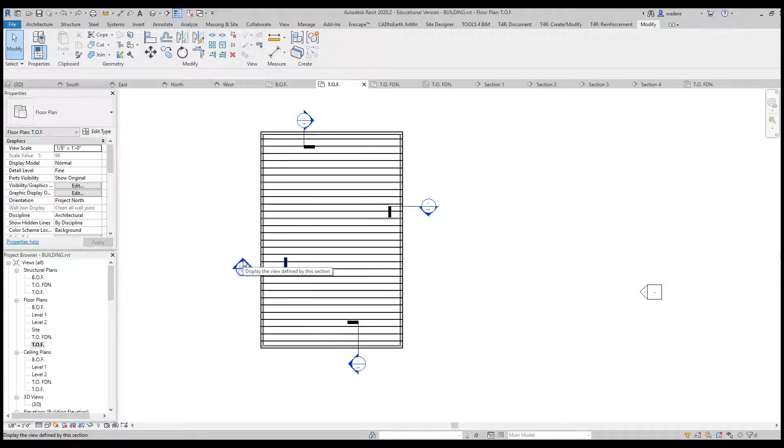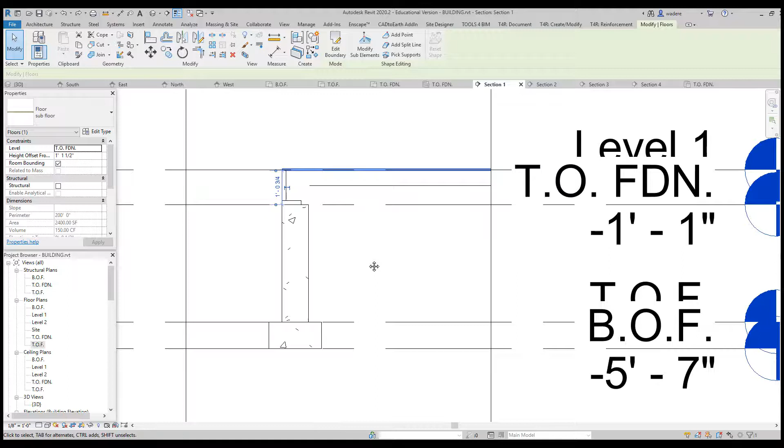One of the first things I want you to do is cut a section through each of the 4 sides of your building. When I went back and looked at mine, I had some issues with things not aligning properly, so it's very important that you get everything aligned properly before you move on. You should have your footing, your foundation wall, your 2x8 sill plate, your 2x12 floor joist, and then your subfloor on top of that. Check all 4 walls to make sure everything is in alignment and that yours looks similar to mine.

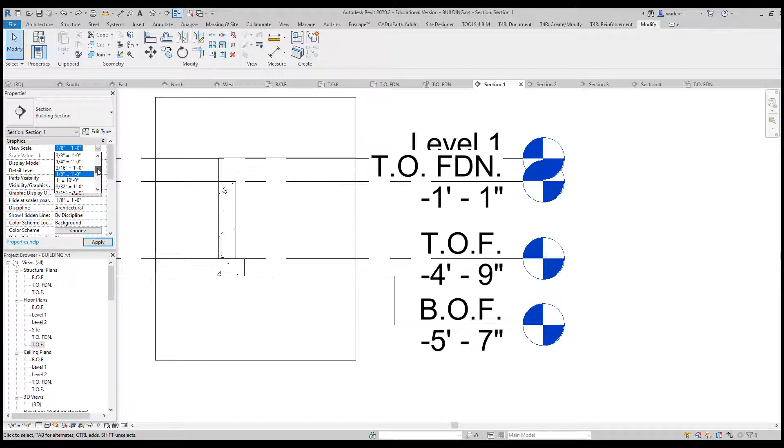In the last video, we discovered that we were not level with our level 1, so I want to get this put back where it's supposed to be. This is just kind of a big mess, and if you look at the bottom left corner, we're at 1/8 inch equals a foot. If we come up to the view scale and change this to 1/2 inch equals a foot and hit apply, now we can read those numbers a lot better. Typically when you're doing a section, you're going to do it at a much larger scale.

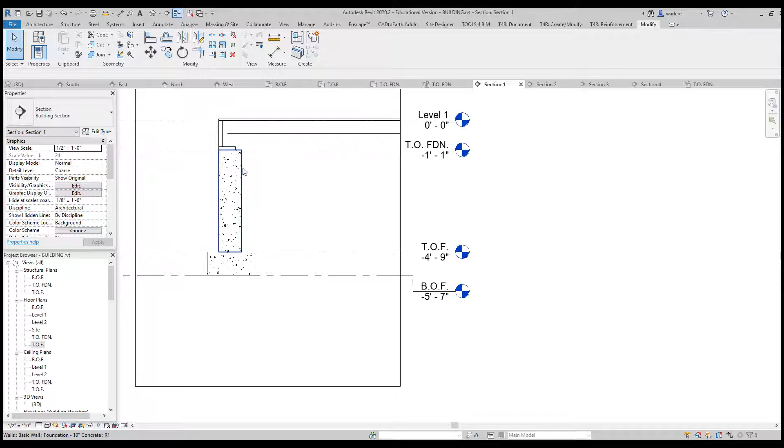The very first thing I want to do, if you recall, is we tied a lot of things to the top of the footing and the top of the foundation. I'm looking at this as a teachable moment, as I made a mistake on my math, which probably doesn't surprise any of you. The teachable moment is that I get to show you how to fix it very easily, and again, this is why it's important to constrain things to certain levels.

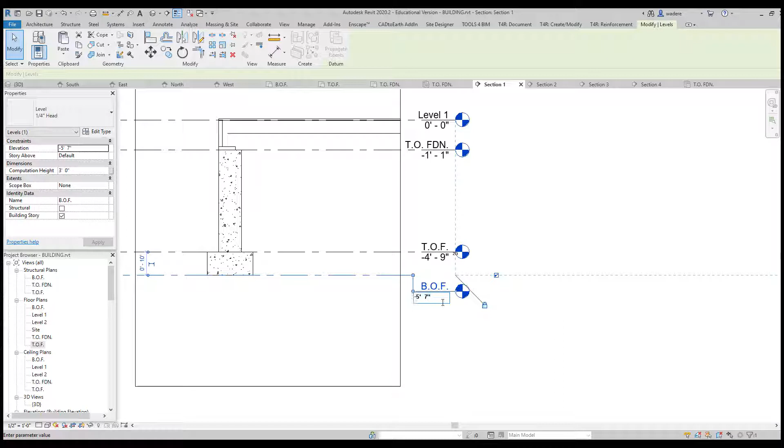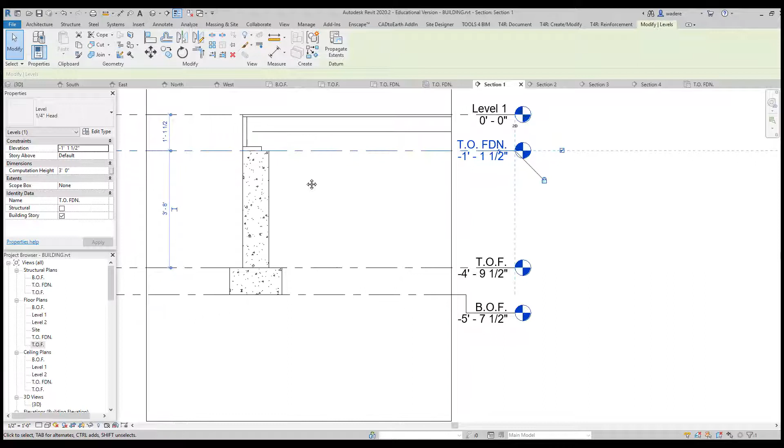So the very first thing is I figured out that I'm 1/2 inch off. I need to make this 5'7 and a half. And this one, I need to make 4'9 and a half. I want to make this -1 foot, 1 and a half. And now everything up here moved down because I had it tied to my top of foundation, so I very quickly fixed my issue. This just goes to show you that we do make mistakes, but luckily we caught this one early on and were able to fix it very quickly. Again, a wonderful teaching moment.

Here is another situation that I would hope you had realized. This one I actually did intentionally. We had shown our 2x12 floor joist spanning 40 feet. Hopefully you realize that a floor joist cannot span 40 feet. If it did, you would have a lot of deflection and your floor materials such as tile would pop up, your furniture would not set level, things would roll off the cabinets.

There could be all kinds of issues. Typically your engineer is going to tell you what it needs to be, but here's a floor joist table, and we were going to use 2x12s. You want to look at where it says maximum span. We did ours at 24 inches on center, so really we can't go any more than 14 feet 4 inches. I wouldn't even want to go 20 feet with them 12 inches on center. So let's look at doing 16 inches on center, and our maximum span then is going to be 17 feet 7 inches.

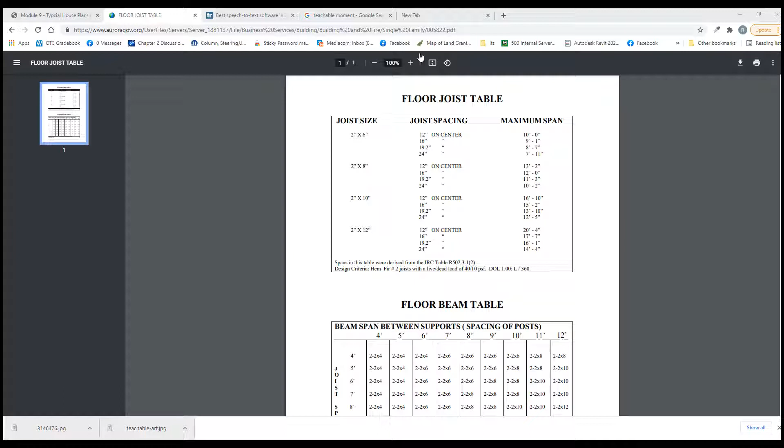So to change our floor joist spacing, the easiest thing to do is to go to your 3D view and then pick your subfloor. Make sure it says subfloor, and then right click and do hide in view elements. That way we can actually see all of our joists.

If I put my cursor over here, you'll notice if I pick right here, it just picks the one joist, but if I come out this way, it picks all of them. So if I pick those, all I have to do is come over here, change this to 16 inches on center, and hit apply.

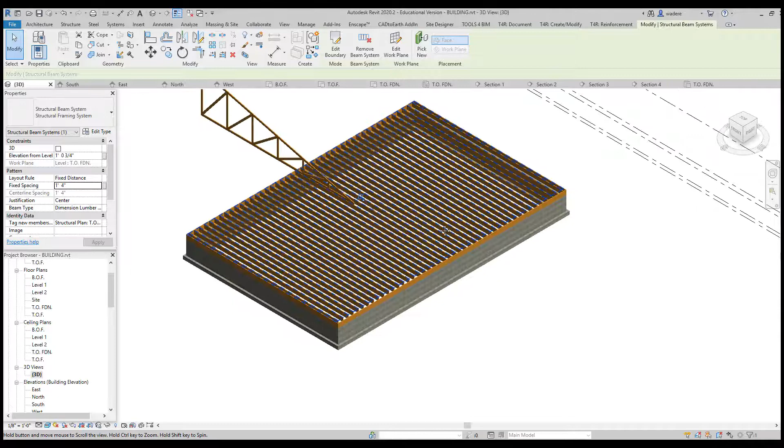And now you see it just automatically updated it. How awesome is that? Just think if you had to go make that change in AutoCAD, how long that would take you.

Then all I have to do is come down here to the light bulb, grab that floor again, and say unhide element, and close that window. So that one was very, very easy to fix.

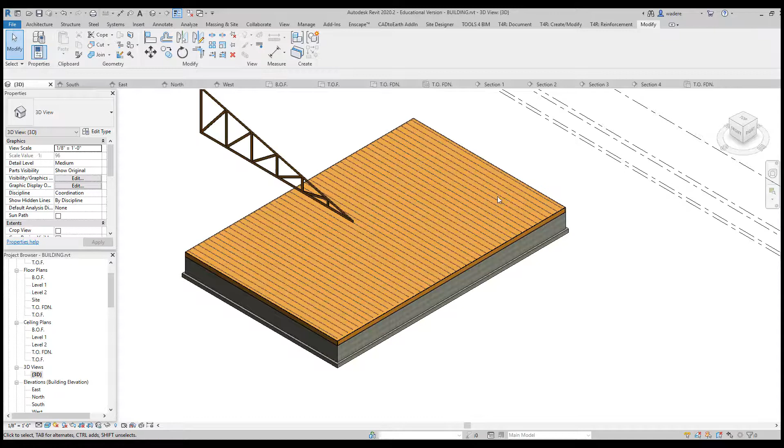The next thing we've got to do is put in some intermediate supports to support the spans we were looking at on the chart. According to the chart, our maximum span for a 2x12 floor joist at 16 inches on center, which is what we just changed ours to, is 17 feet 7 inches.

Our building in one direction is 40 feet and in the other direction is 60 feet. So we need to add some intermediate supports to break these floor joists and support them, because otherwise, like I mentioned earlier, we're going to have sagging floors and lots of issues.

In the 40-foot direction, we need to divide that by 3, so we'll have 2 rows of supports running in the 60-foot direction. In the 60-foot direction, we're going to add 3 rows of supports to carry the load.

You could just come in and put in another foundation wall with a footing, but that costs a lot of money, so we don't want to do that. Instead, we are going to create some little columns underneath our support areas where we need the supports.

These columns are going to have first a footing that is 24 inches by 24 inches by 10 inches deep - a square that is 24 inches by 24 inches and 10 inches under that column. The column itself is going to be a 10-inch round concrete column.

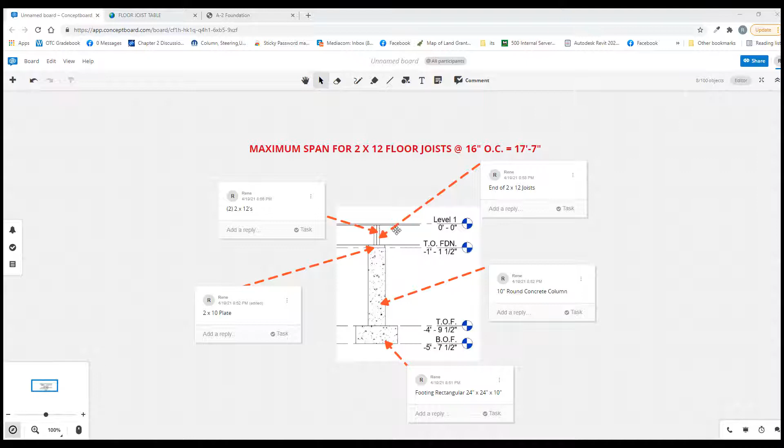On top of that we will have a 2x10 plate, and then we will break our 2x12s at our distances with 2 2x12 joists for that intermediate support, and our subfloor will just continue across that. So this is kind of what we're getting ready to do.

So I'm going to go back to my structural plan, to my top of footing, and the first thing I'm going to do is just place a column in here. Once I get the columns placed, it's very easy to add the footing and the remainder of the pieces.

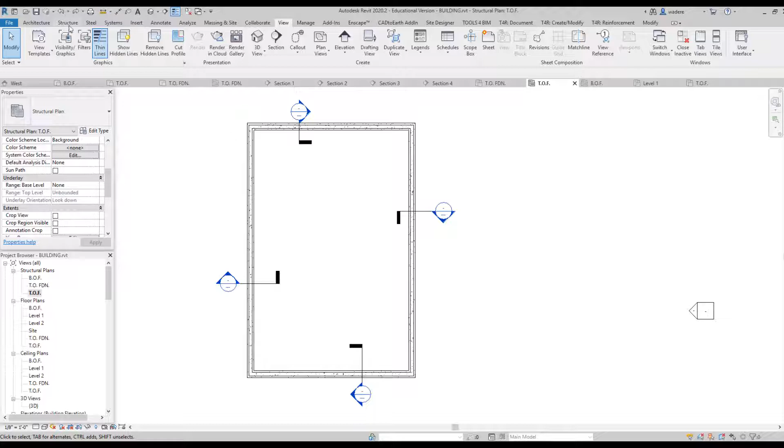So I'm going to start there - go to structure, go to column, and go to load family. We come down here to structural columns, and you see you have concrete, and if you go in there you see you have a round column. So that is what we're going to go with, a concrete round column.

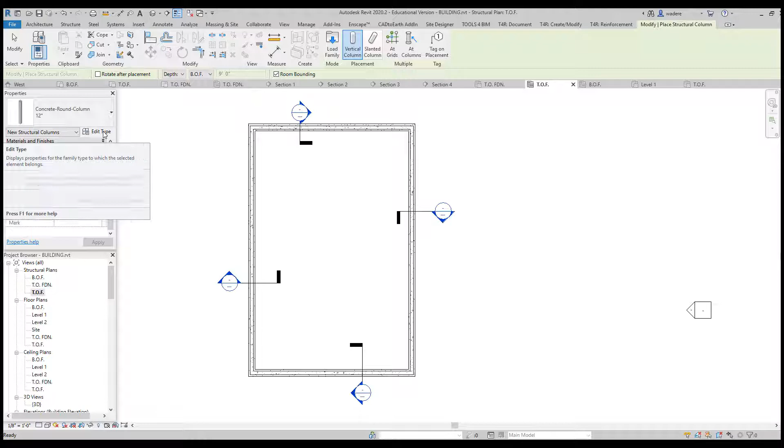If I double click on that, it brings it into my drawing. I have already created one - yours probably came in as like a 12-inch. So we need to modify that to be a 10-inch, which I have already done. You would just go into edit type, duplicate the name, make it 10 inches, and change this dimension to be 10 inches. Once you've done that, you are ready to place it.

You can see I have placed mine. If I zoom in on that, you'll see the base level is bottom of footing, which I really want to be at top of footing. The first thing I'm going to do is change the top level because I want it to be at the top of my foundation. So I'm going to change that. Now the base level I am going to change to my top of footing, and say apply.

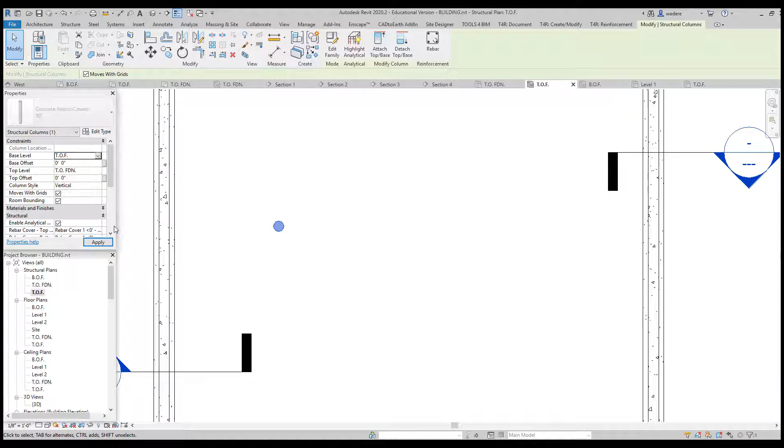So now I have a column. If we go and look at this three-dimensionally, and I scroll around to where I can see below, you can see I have a nice round column.

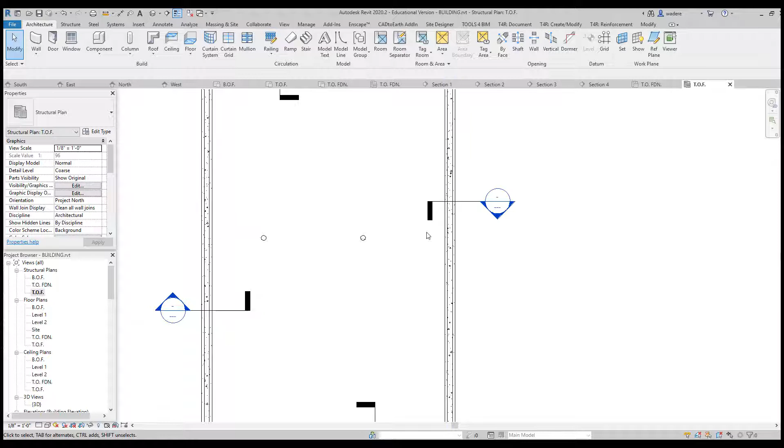So I'm going to go back to my top of footing plan, and the next thing I'm going to do is grab this and copy it from here to here, and I want to have 3 equal spaces in here. So first I'll go to my annotate tab and do my dimensions, and I want to pick the inside of this foundation wall, not my footing - this is my foundation over here.

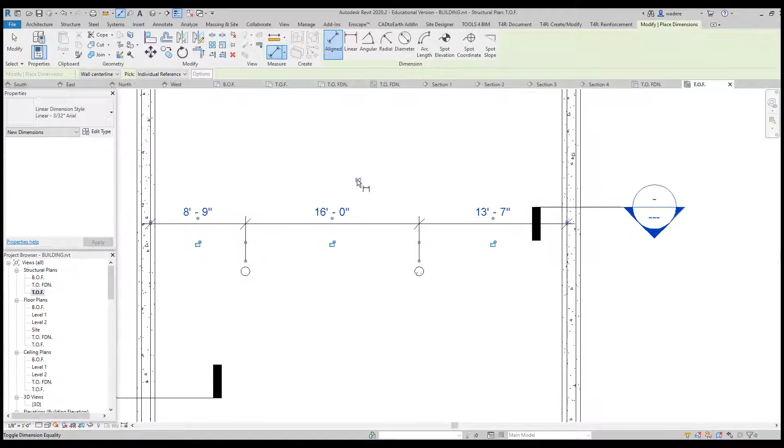And then I want to go to the center point of my column, and again I want to pick my foundation wall. Then I can click on the equal sign, and now it put it equally in here the way that I wanted it. So that is great.

The next thing I need to do is divide my space this direction. I said I wanted 3 columns in here. So I'm going to go to modify, go to copy, grab these, and do copy. I want to copy multiple because I'm going to copy from here to here and then down to here.

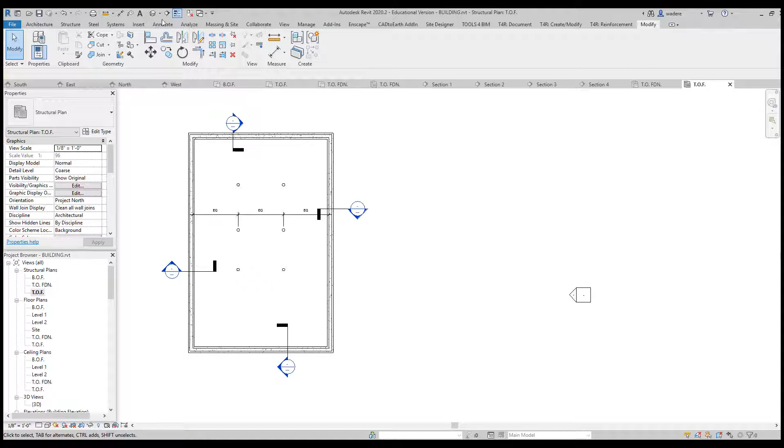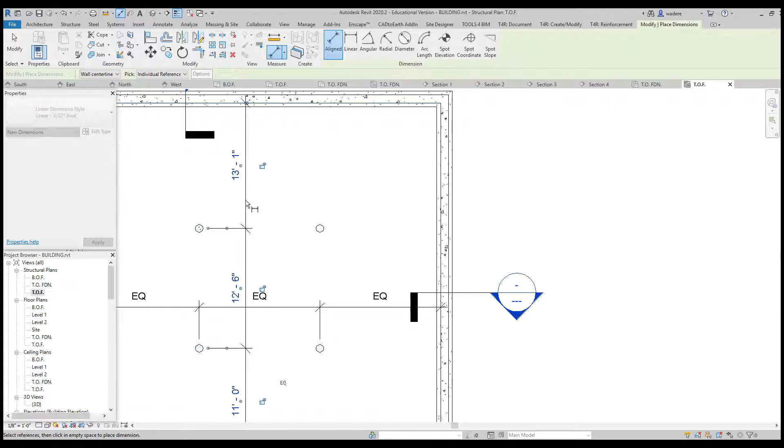Again, I'm going to use my dimension tool and do aligned. I want to come from the foundation wall, not the footing wall, to the midpoint, to the midpoint, and back to my foundation wall. I'm going to place that, and again click on my equal, and now they should all be placed equally. I'm going to get rid of these dimensions so you have a better idea.

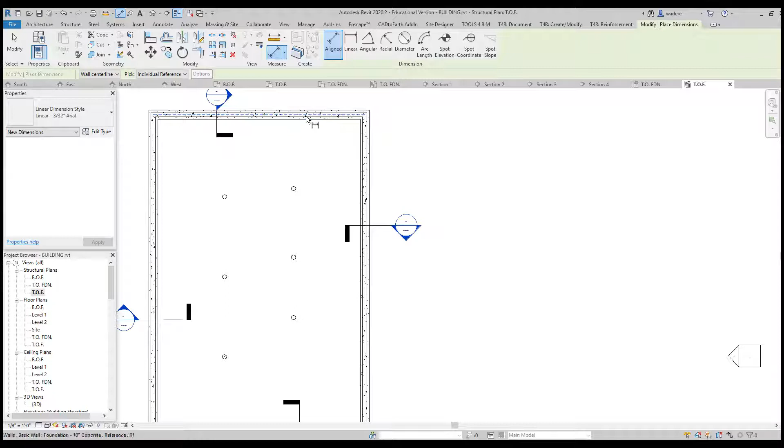I also received a warning over here, and I just need to unconstrain my items. Now that I removed those dimension lines, I see that I have not moved the other row of columns, so I need to do the same thing.

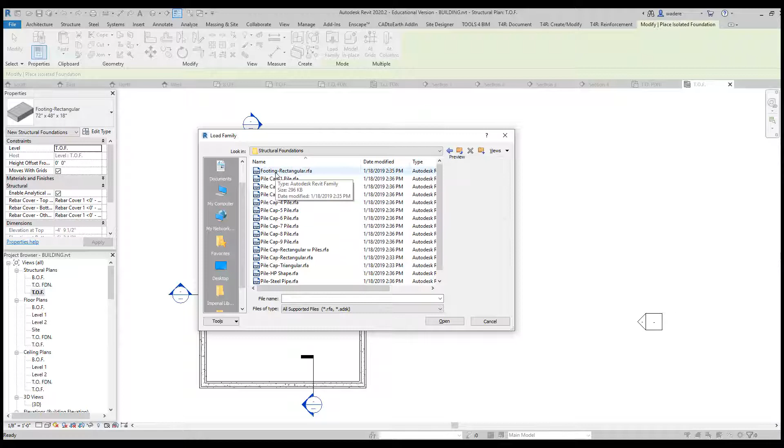Next, I want to place my footings. So if I go to structure and go to isolated, it's going to probably tell you you need to load family. So you're going to go to load family, scroll down to structural foundations, and pick just the footing rectangular and say open.

As you can see, this is a really large footing, and according to our information that we looked at earlier, we wanted a 24 inch by 24 inch by 10 inch. The choices we have are way larger, so we need to edit type, do duplicate, and change this to 24 inches, 24 inches, and we wanted ours to be 10 inches deep.

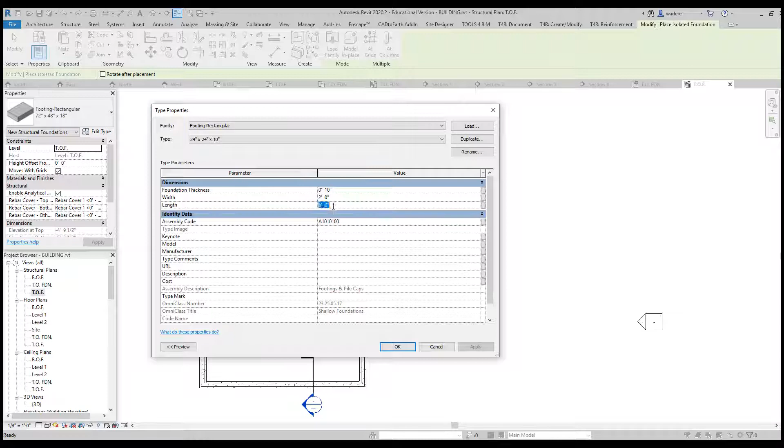And say OK. Then here we need to change the thickness to 10 inches, and this needs to be 2 feet, and this needs to be 2 feet, and say OK. Now we have our 24 inch by 10 inch footing, and I want the level to be top of footing.

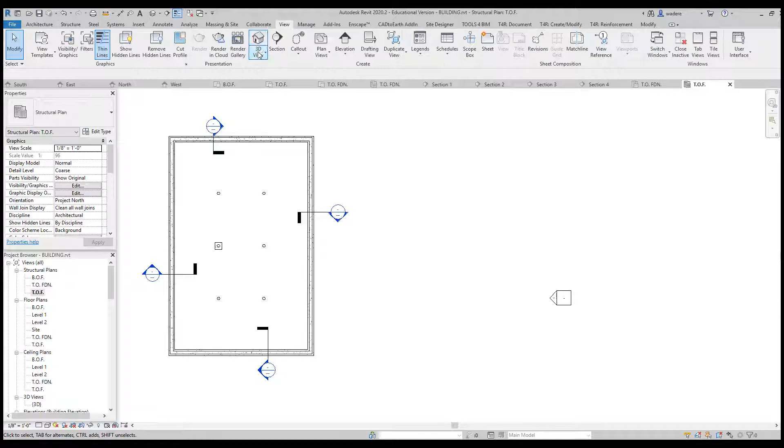I'm going to scroll over here, and I'm just going to place one of these for now before I place all of them, and I want to do a 3D view to make sure it came in where I wanted it to, and it looks really good.

So I'm going to go ahead and continue and place these. Again, I'm just going to go back to my structure tab, isolated, I already have it, and I'm just going to pick the center point of each of my columns and place this.

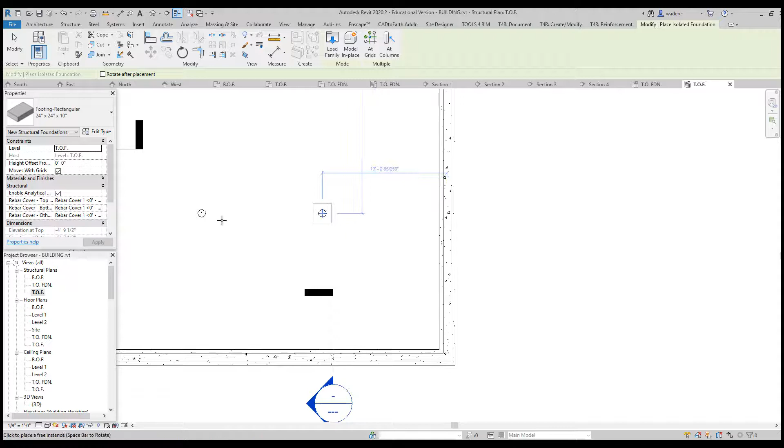Looking at this from the plan view, right now we have 2x12s running continually this way, and we've placed some supports this way to help break up that load span between each one of these. So what we're going to do is add 2x12s running this direction at the same level as our joists.

So that they can come into that column support and have something to tie into and set on top of those columns. And again, we can't span our 2x12s all the way this direction, so we'll span one set from here to here, one set from here to here, one set from here to here, etc, so they rest in each direction on these columns.

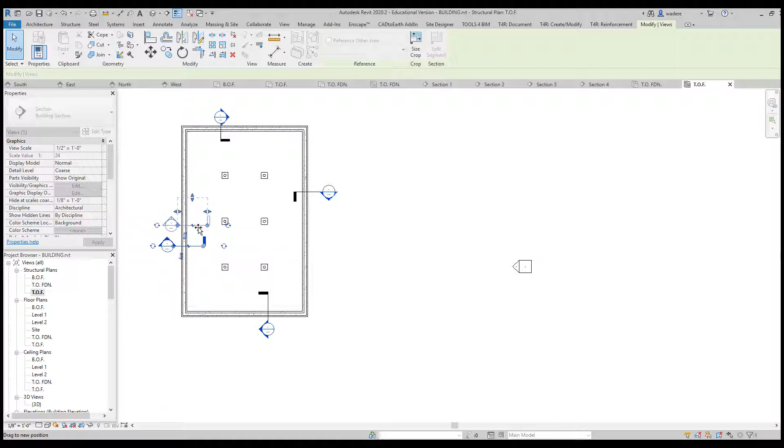To make this a little easier to understand what's going on, I'm going to move this section mark up, and drag this out and this out. And I'm actually going to go to my section so you can see what I'm talking about.

If I change my view to fine, you'll see right here is my 2x12 that's running in the 40-foot direction. What I'm going to do is break this right here. Now we are not actually going to go in and break ours because I don't want to spend the time doing that. But they would actually stop at this location, and these two 2x12s that we're going to run back in the other direction would be placed there.

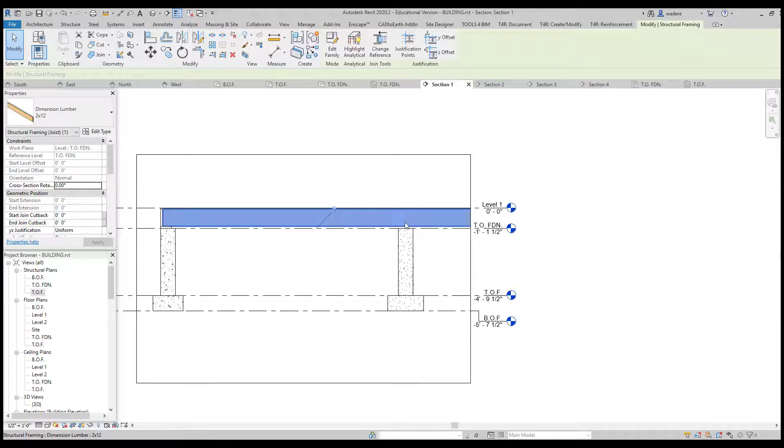The next thing I'm going to do before I go any further is pull this out to where I can see the next column, and I'm going to do something to make things go just a little bit faster for me.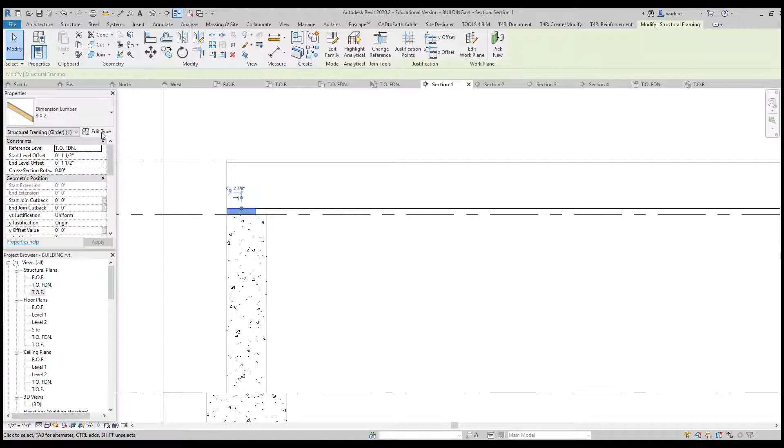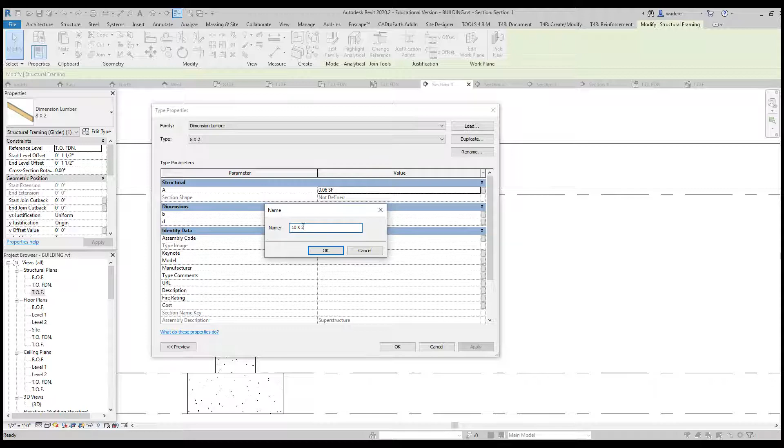I'm going to grab this 8x2 that we did at the perimeter, copy it, and go from its midpoint to the midpoint of my column. What we wanted was an actual 2x10, so it lays the way we want it. I'm going to pick this, go to edit type, duplicate it, and make it a 10x2. A 2x10 is actually 9 1/4 by 1 1/2, so I'll change that and say okay.

Now you see it got bigger. I'm going to grab this one. Now that I already have my 10x2, I'm going to pick it. So we very quickly added those on there.

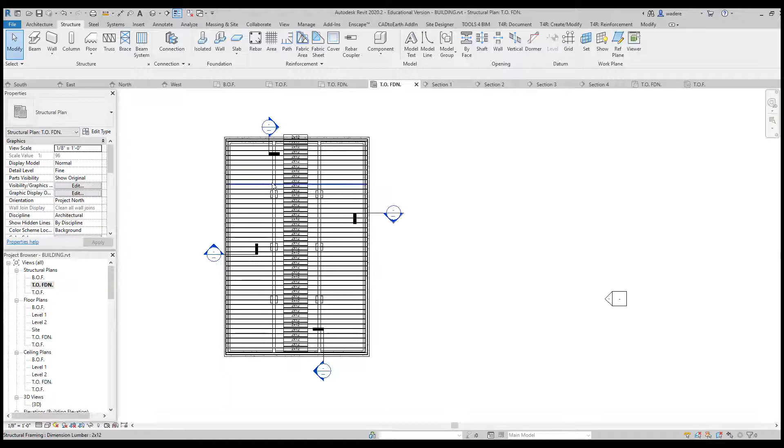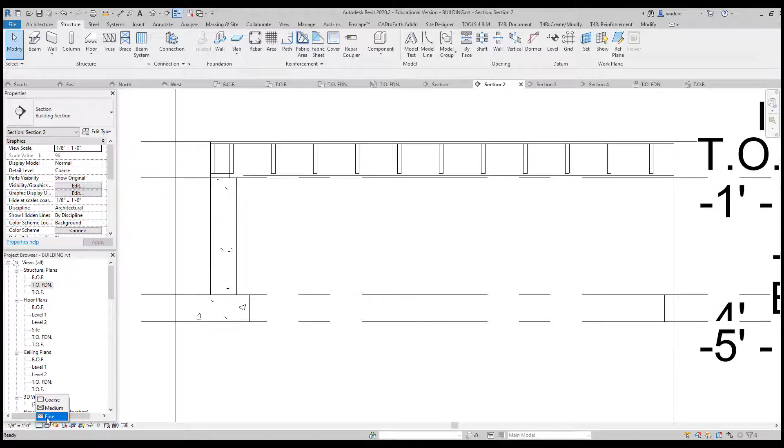I need to go back to my plan, and this time go to my top of foundation plan, and I can actually see those now. Here is that 10x2 and the other 10x2, and they should go all the way to my foundation wall. I want to check that, so I'm going to pull this section mark over and go to that section and change this to fine, and there you can see it doesn't come all the way over, so I need to align these.

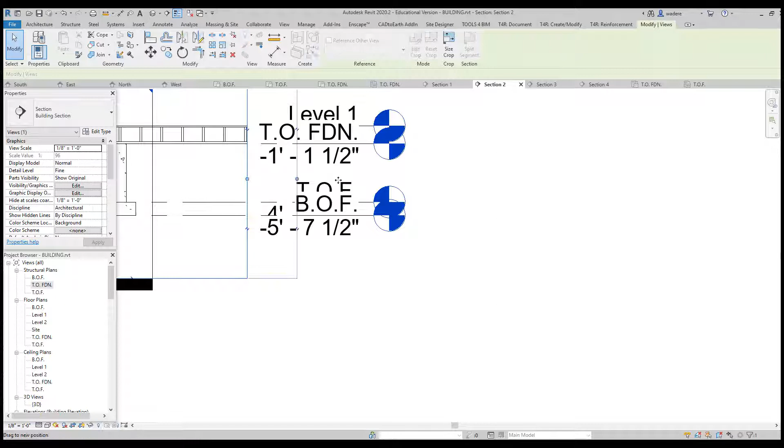Probably I have the same situation at the other end. I'm doing it in my section because in my plan view I have so many lines, it's really hard to tell if it's going all the way or not.

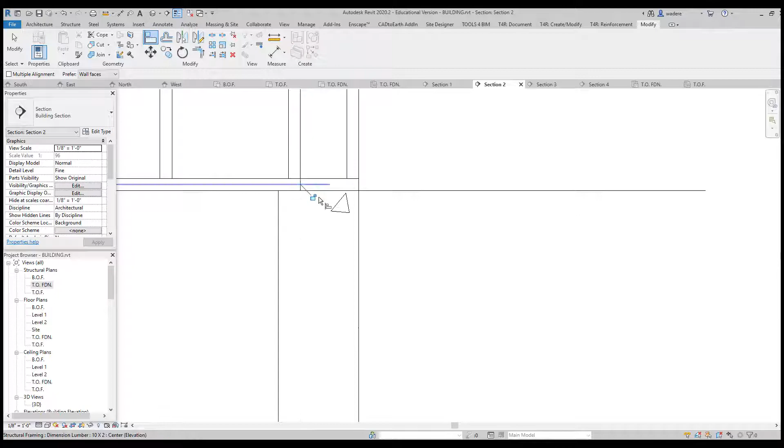Now if I click on it, again it needs to come all the way over to this 2x material. So I'm going to do my align, and align those elements, and then I'll need to go back and do that on the other one.

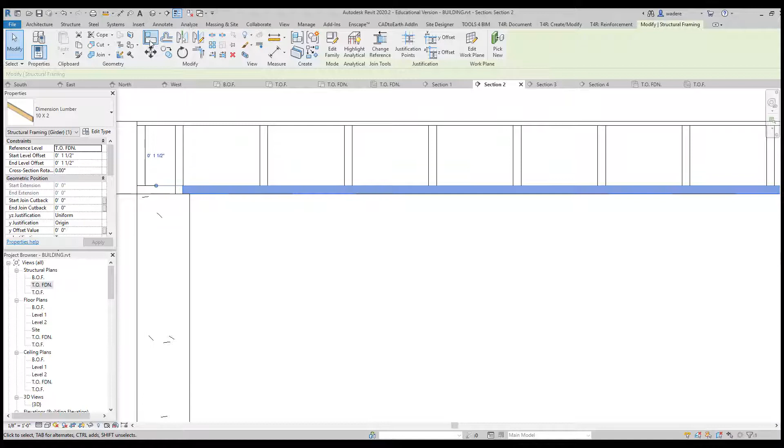Again, I'm just going to grab this and drag it over, and instead of creating multiple sections, I'm just doing one section mark on that side, and I can move it around to wherever I need it to be. So again, I'm going to align these, and the same at the other end.

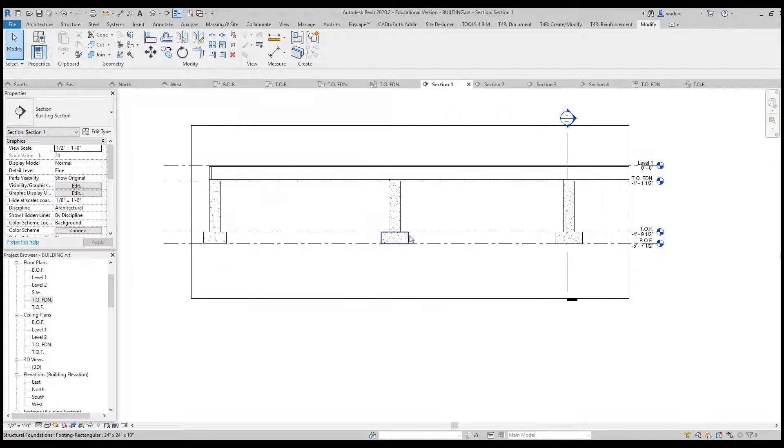If I go back to my plan and the original section we were looking at, now I have my footing, I have my columns, and I have my 2x10s or 10x2s. The next thing I need to do, if we look back at our section, is add these 2x12s running in the other direction.

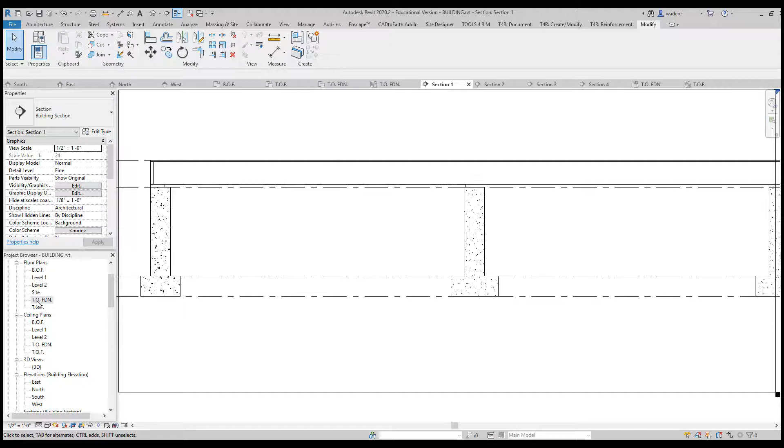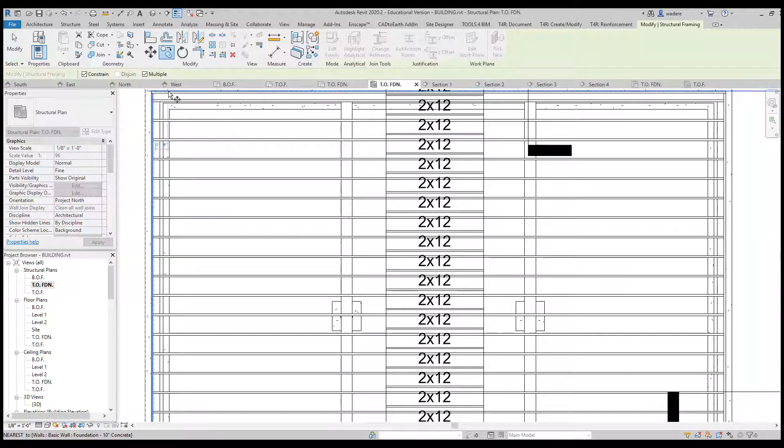I'm going to go back to my top of foundation plan under my structural tab. What I want to do is run my 2x12s on top of where these are. Right here is my 2x12 that I have on the perimeter. I'm just going to copy these because they're at the right height, right where I want them, and I want this point to be at the midpoint here. So now I have that 2x12, and I'm going to do the same thing over here.

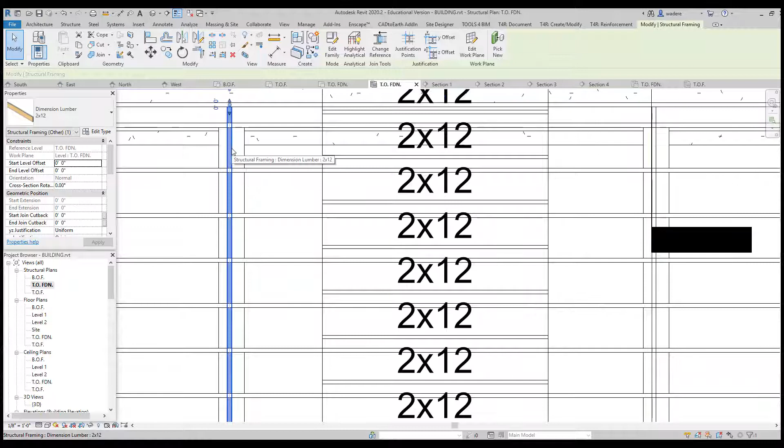Now I need to place another one on the other side of it. So again, I'm going to select that one, and select that one, and use my copy again, just copying from this point to this point. Now I should have my 2x12s in there where I need them.

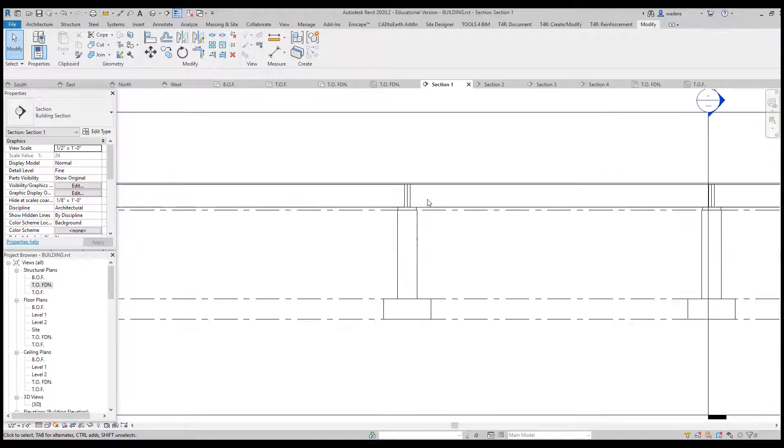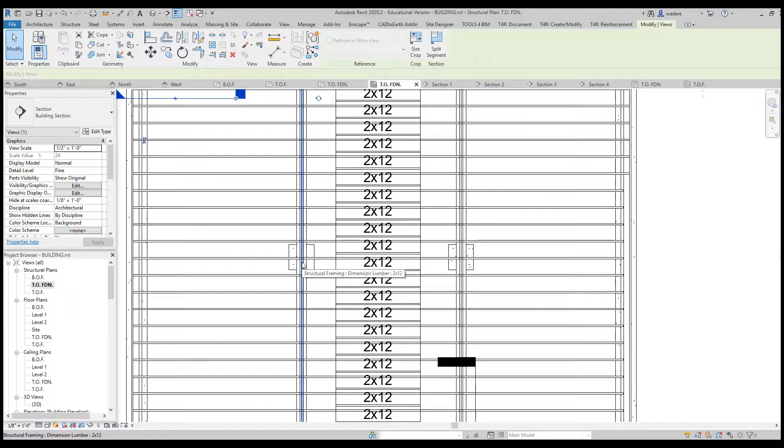If I go back and look at my section, you'll see now I have my 2x12s, and in reality this 2x12 would break at each of these points—you could do that if you want, but I don't want to spend time going into each joist to do that. Now if I look back at my top of foundation, I have joists running all the way through here. So again, these would need to break and set on top of my columns, but I'm not going to do that again for the sake of time.

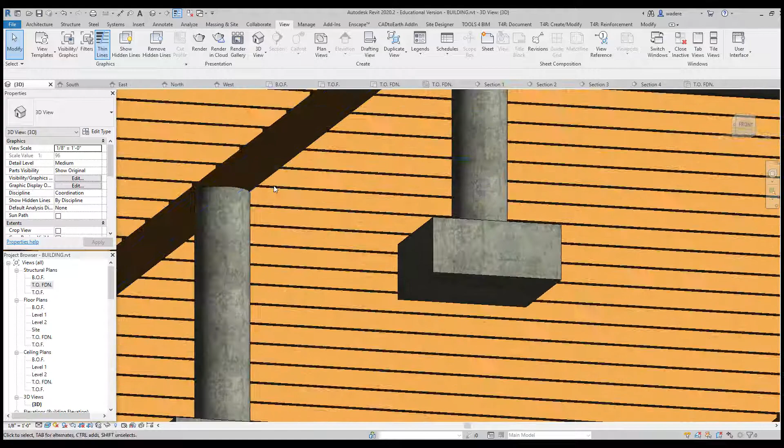If I now go and look at my 3D view and look underneath it, you can see that I have my 2x12s running this direction, and I have my column and my footing. So we have corrected our span issues that we had created.

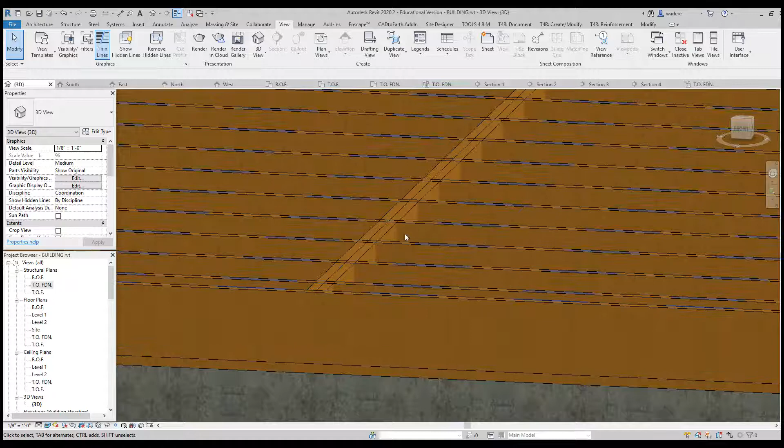If I hide the floor, you can see my two 2x12s running in this direction. And like I said, these ones running this direction would be broken at this location, and where this one sits on top of the column, again, it would be broken in that direction.

Now that we have everything corrected, we are ready to add our wall framing. That will be in the next video.